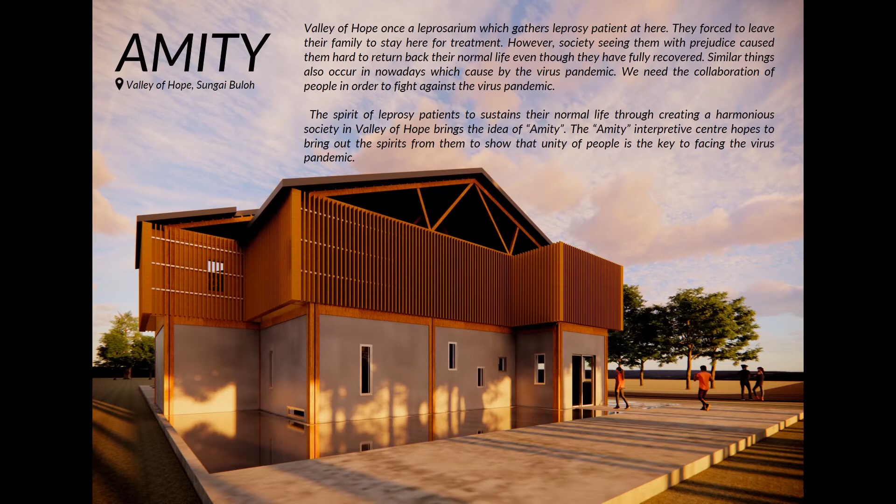Today I would like to present my interpretive center design to you, which is called AMITY. The site given is at Valley of Hope, Sungai Buloh. It was a leprosarium which gathered leprosy patients here. The patients were forced to leave their families to stay here for treatment. However, society seeing them with prejudice made it hard for them to return to their normal life even though they had fully recovered. Similar things also occur nowadays, caused by the virus pandemic.

We need the collaboration of people in order to fight against the virus pandemic. The spirit of leprosy patients to sustain their normal life through creating a harmonious society in Valley of Hope brings me the idea of amity. The Amity Interpretive Center hopes to bring out the spirit from them to show that unity of people is the key to facing the virus pandemic.

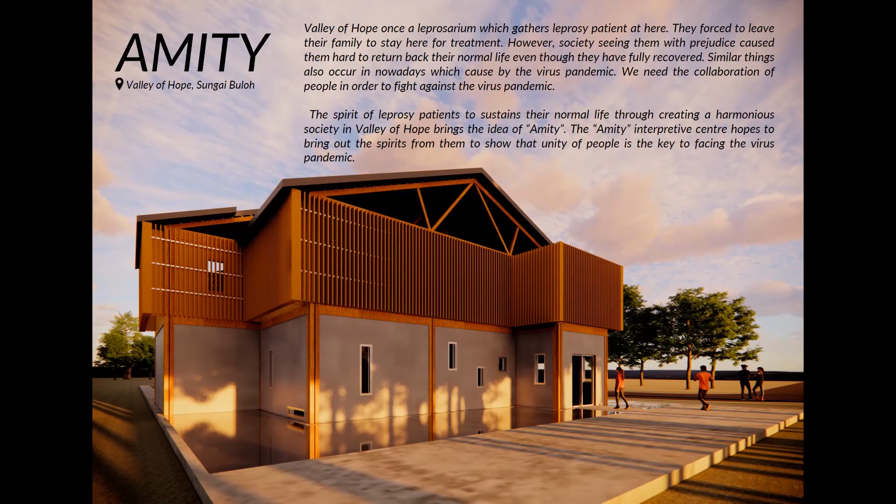First of all, I will start with site introduction. The site that I have chosen is the hall site and the building location is the shops behind the hall. It is 52 meters long and 18 meters wide. There are three main components surrounding the shops, which are the community hall, nursery, and kindergartens.

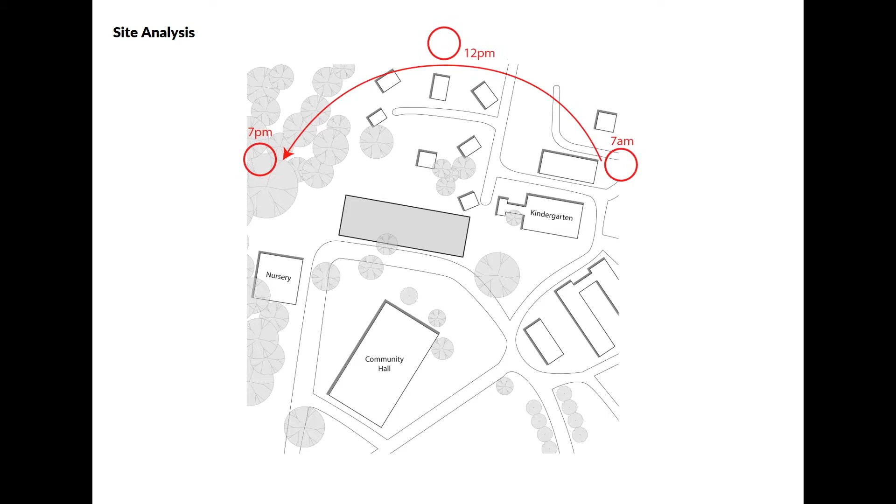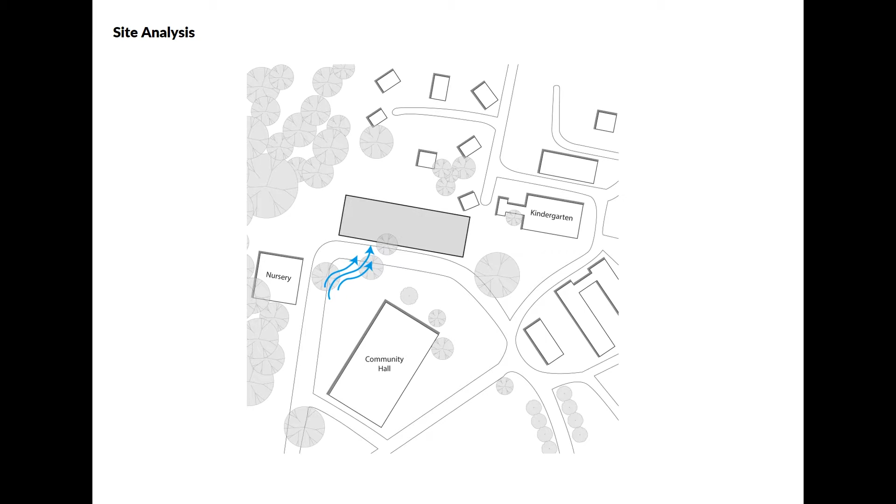Next will be the site analysis. The eastern and western sun is at the short side of the shops, while the north and south sides with long length can have large openings. The main wind comes from the southwest side, while the shops are also located at the main vehicle circulation. People can also access the shops by walking from the nursery, kindergartens and community hall. And those three places are where the main noise comes from. This makes the place livelier.

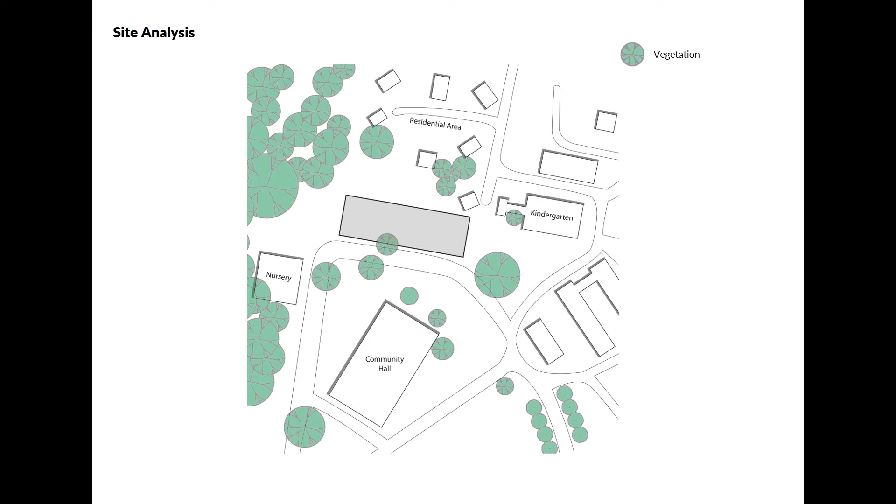And we can see that the west side has a large amount of vegetation, which provides shade to the shops, reducing the western sun directly penetrating the buildings.

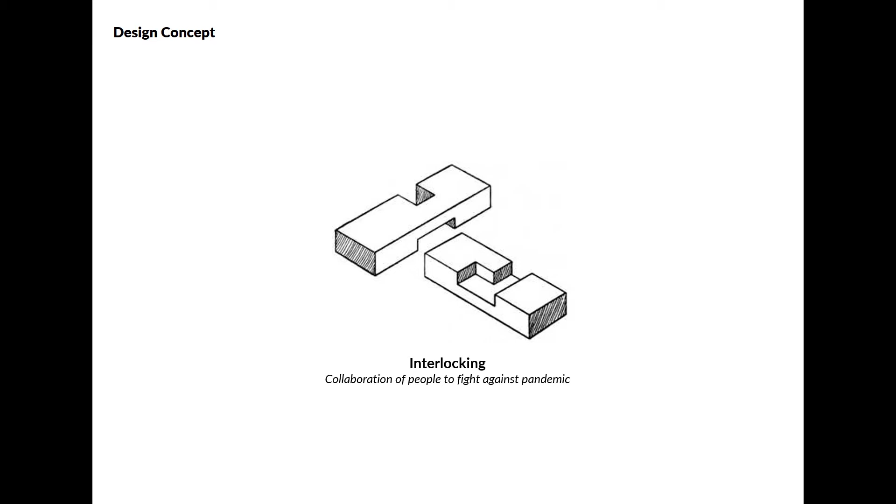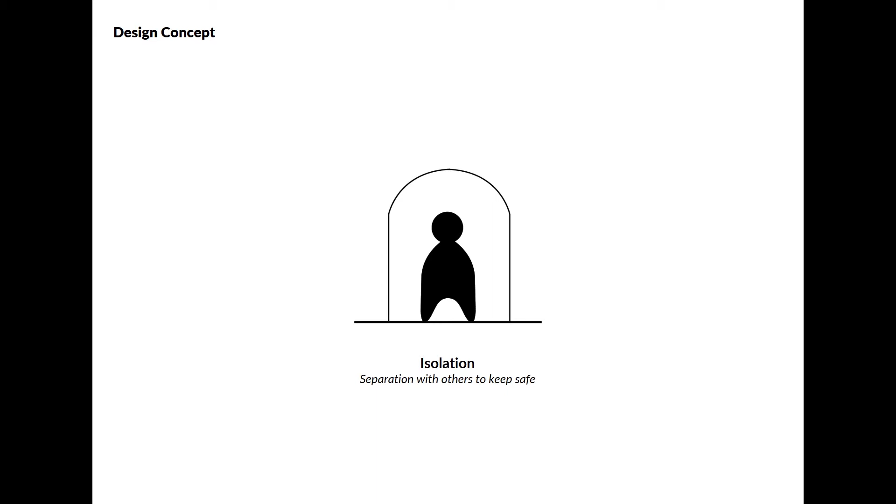Furthermore will be my design concept. There are three narrations. First will be interlocking. No matter for leprosy disease or nowadays pandemic, people need to work together in order to fight against the difficulty we face. Collaboration of people is just like interlocking, in which each of us plays a main role to face the pandemic. Second narration will be isolation. We need to keep social distancing or even quarantine to make sure ourselves are safe. This was experienced by leprosy patients, who had to isolate themselves from their families.

Third narration is appreciation. Some leprosy patients have faced amputations, but they appreciate that they can live until today. Same for us, we need to be grateful for what we have now, as it is the sacrifice of frontliners that keeps us safe from the pandemic.

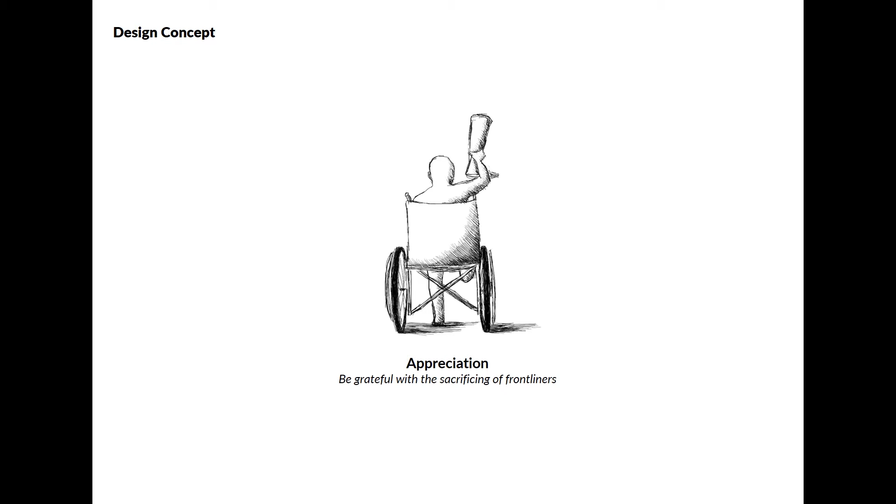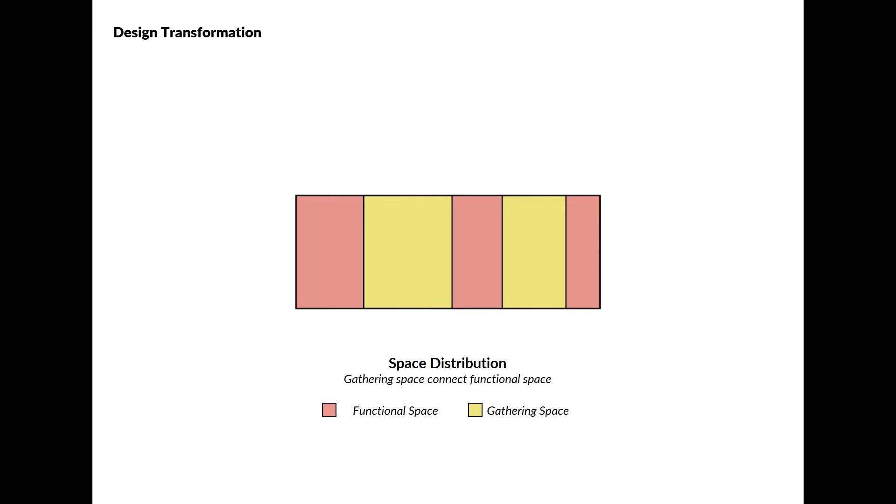Continuing on is the design transformation. First, the row of shops is my site boundary, and I distribute the space by connecting functional space with gathering space. Gathering space acts as the hub for people to access another functional space. Next, cut and fill the space to interlock them. The west side will be the main entrance of the interpretive center, which connects with the nursery.

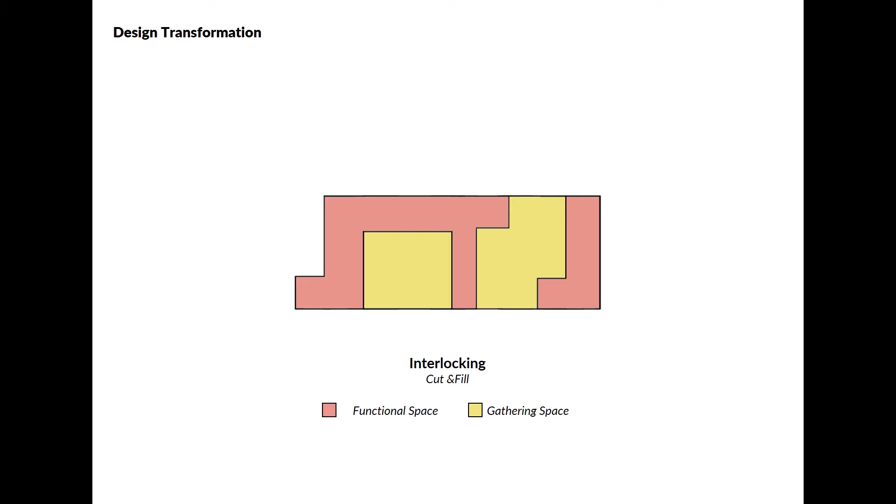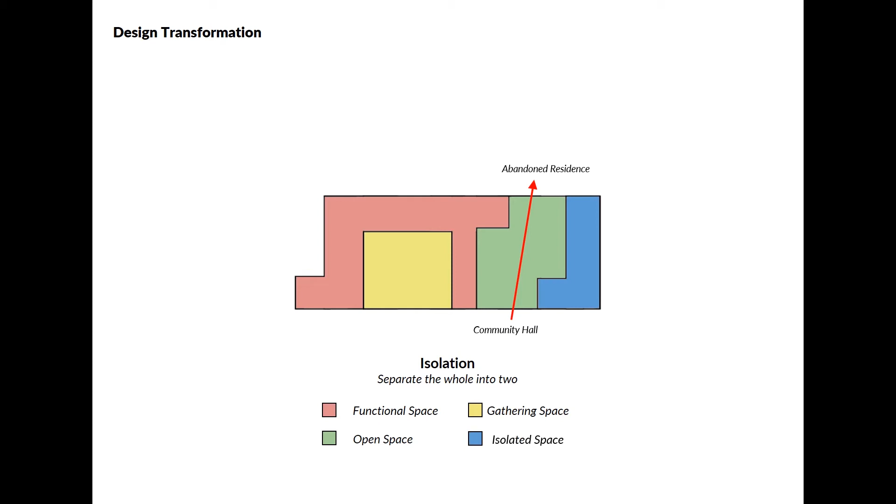Going on is to open up one of the gathering spaces to become outdoor space. The open space provides circulation connection from hall to the abandoned residence through the interpretive center. This isolates one of the functional spaces from others. Going on is to double up the building volume to have more usable spaces. Finally, connect the two spaces by a bridge and have an outer facade which merges the two buildings as a whole when seen from outside. This shows the idea of unity.

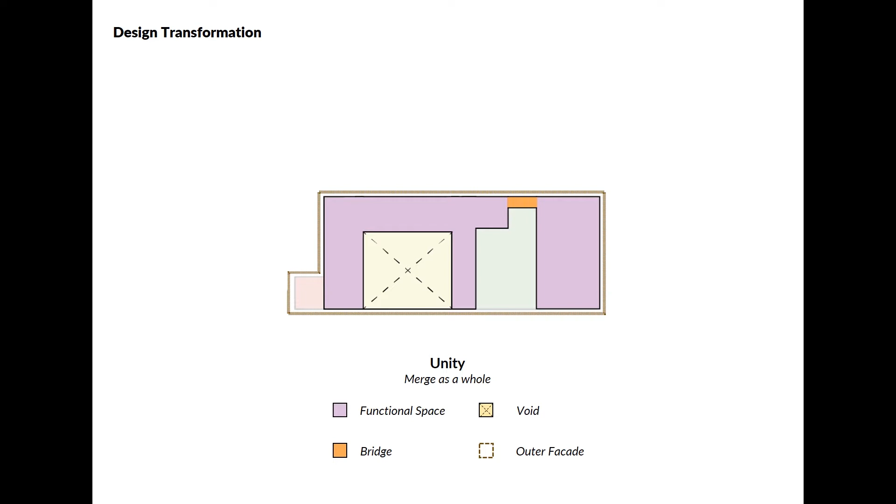Next, as we can see from the site plan, this is how the roof plan of my interpretive center looks like. The main entrance connects the nursery while the exit connects with the kindergarten. The middle open space allows users to have access from the hall to the abandoned residence area. This access and circulation shows how my interpretive center interlocks with surrounding elements and acts as a hub.

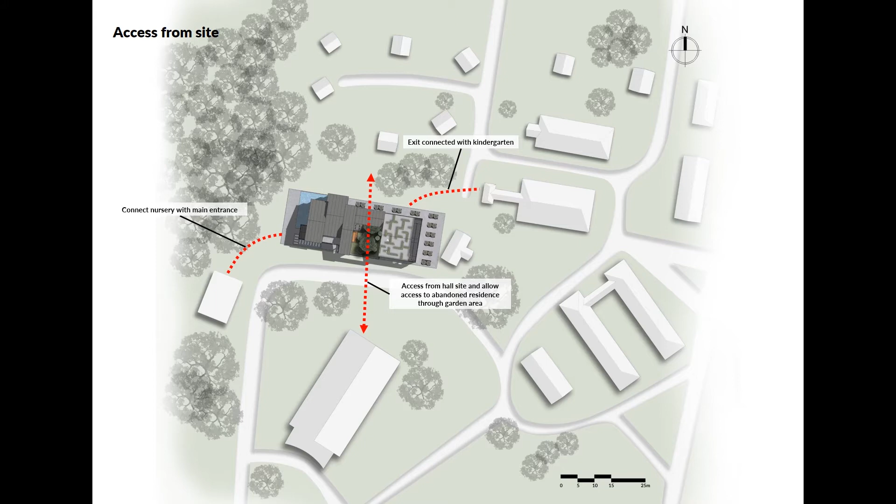Next, this is what we can view from the interpretive center to the surroundings. First is the community hall. Second is nursery. Third is more forest. Fourth is abandoned house. And fifth is kindergarten.

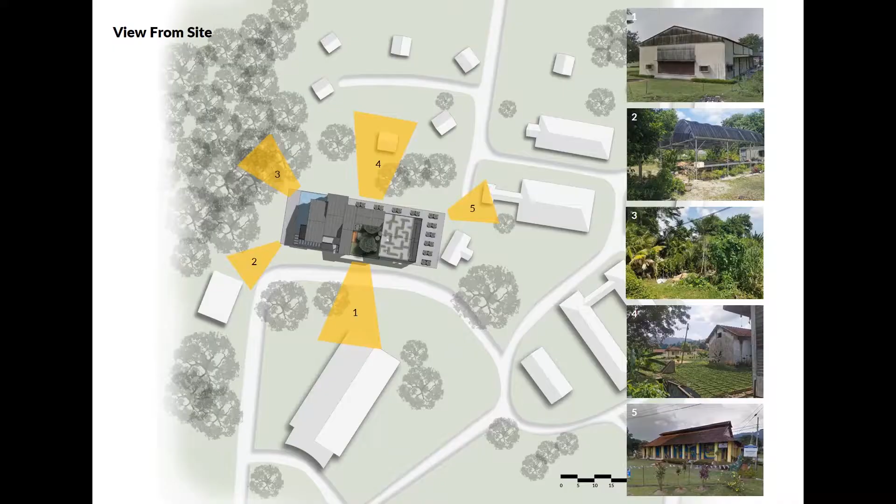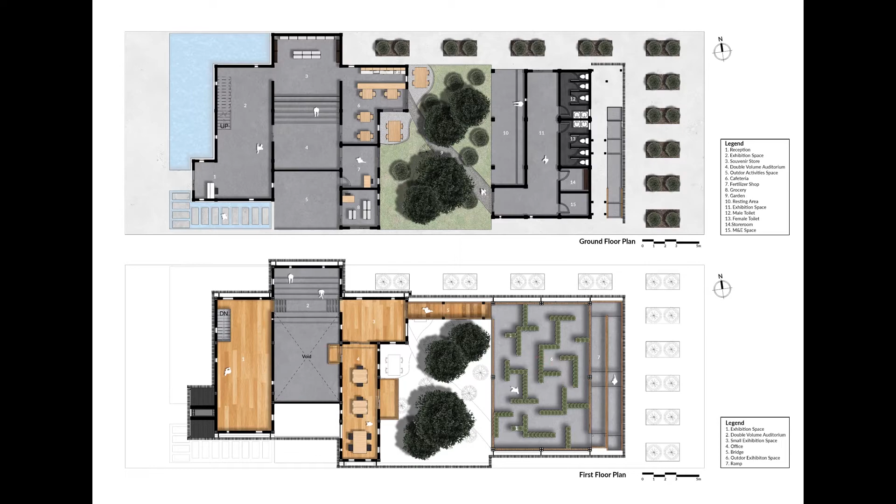For the first floor plan, there will be exhibition space, double volume auditorium connecting the small exhibition space, continuing with office, bridge, outdoor exhibition space, and finally ramp. The covered internal space is 389 square meters in total.

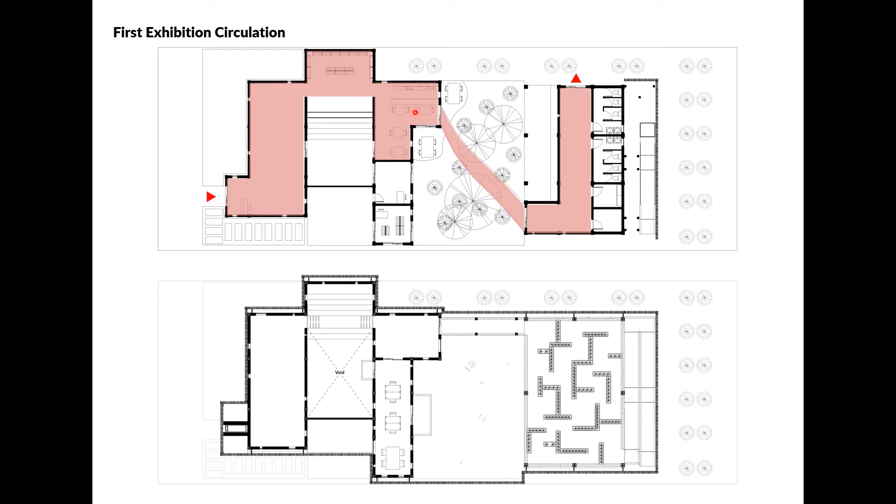Then, we will look at the exhibition circulation. There are two exhibition circulations in the Interpretive Center. First will be the ground floor exhibition, which passes through the souvenir shops and cafeteria from one exhibition space to the isolated exhibition space. Second, we start from the same exhibition space and continue to the first floor, go through the auditorium and small exhibition space, and finally arrive at the outdoor exhibition space by the bridge and exit through the ramp.

We can see that the two exhibition circulations have different exits, which show the narration of isolation through diverging the circulations.

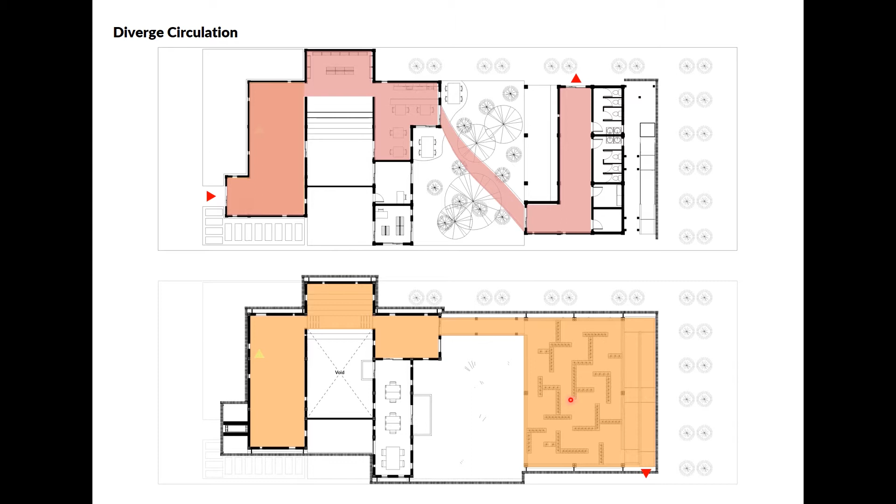Next, we're looking at elevation. First is the east elevation. The outer facade creates permeability of view when people look from the surroundings towards the center. This will create curiosity for people to enter the space.

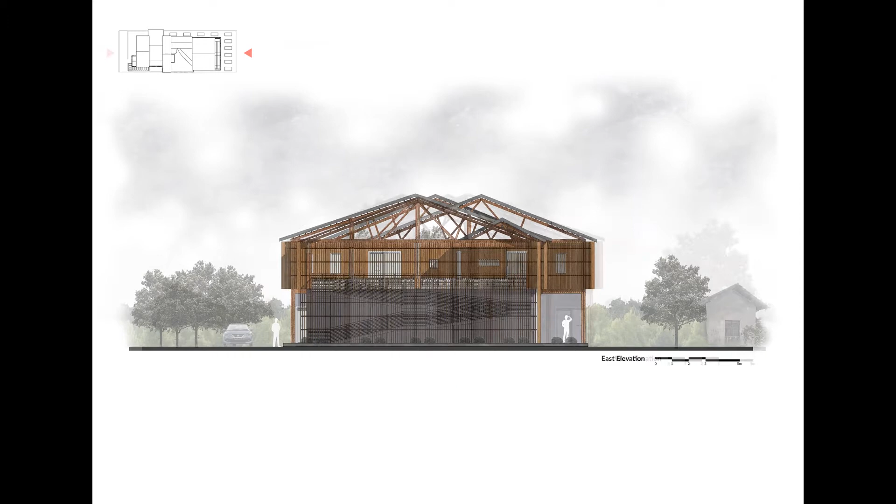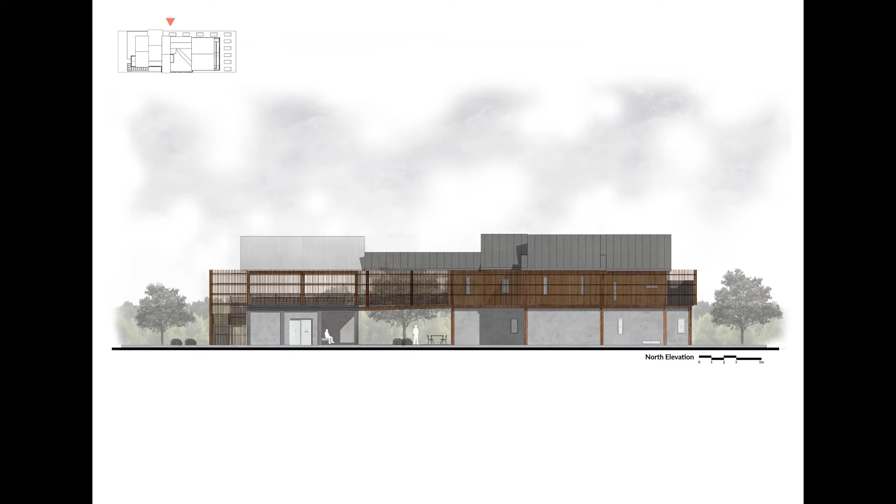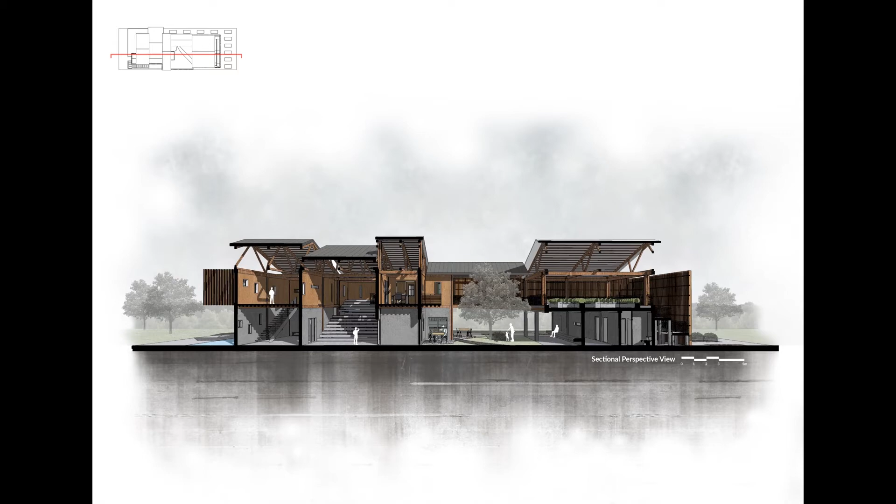For the sectional perspective view, we can see that the ground floor is using concrete while the first floor is using timber, as these two materials represent the history of the site: timber residences were the earliest while concrete residences were newer. The two materials applied also merge past and present together in the interpretive center.

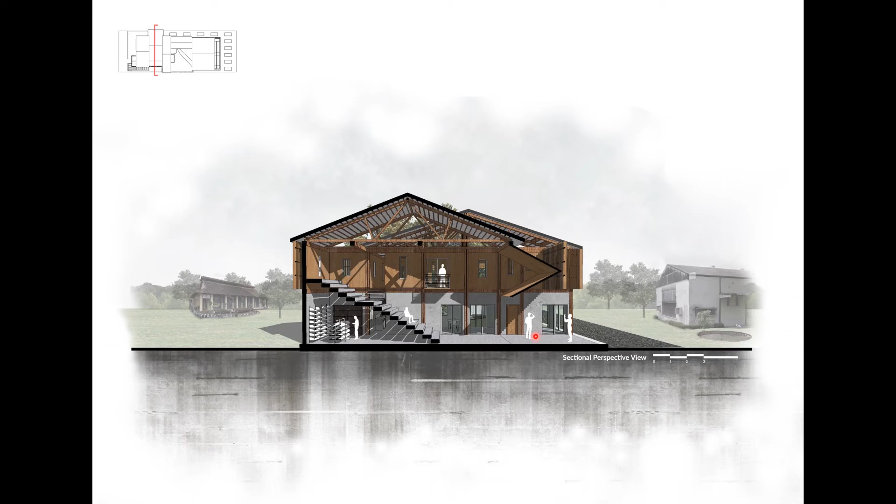From this sectional perspective view, we can see the space distribution of the double volume auditorium and souvenir shop. People in the souvenir shop can glance at the activities occurring in the auditorium through the gaps between the seats of the auditorium. The movable facade helps to open up the space, which can be used as indoor space or to enlarge the outdoor activity space.

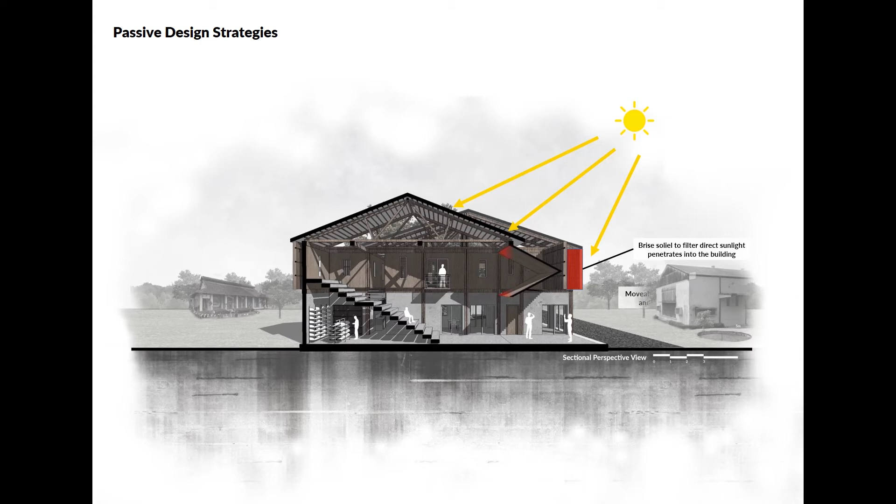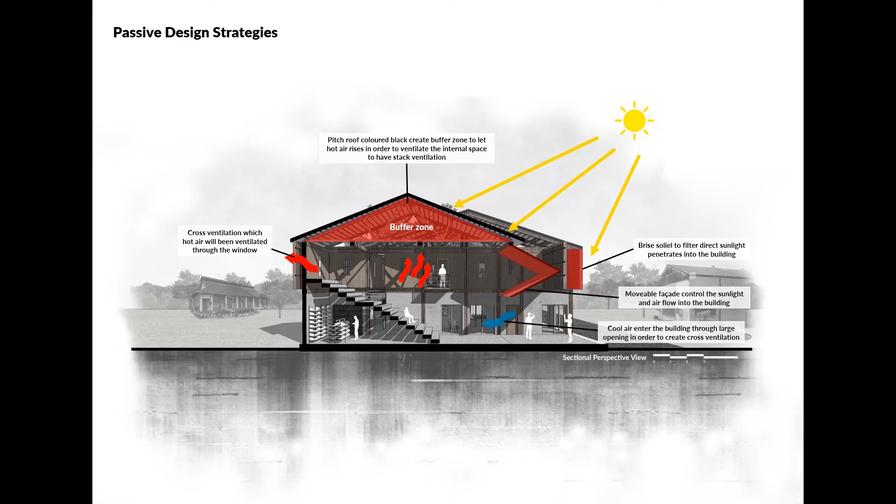Moving forward is passive design strategies. As Malaysia is located in a hot and humid area, it is necessary to have shading to create a comfort zone inside the building. Brise soleil helps to filter direct sunlight penetrating the space, while the movable facade is able to control sunlight and air ventilation. Cross ventilation occurs when cool air comes in from the movable facade and hot air goes out through windows. Besides, when hot air rises, the rooftop area will act as a buffer zone for stack ventilation.

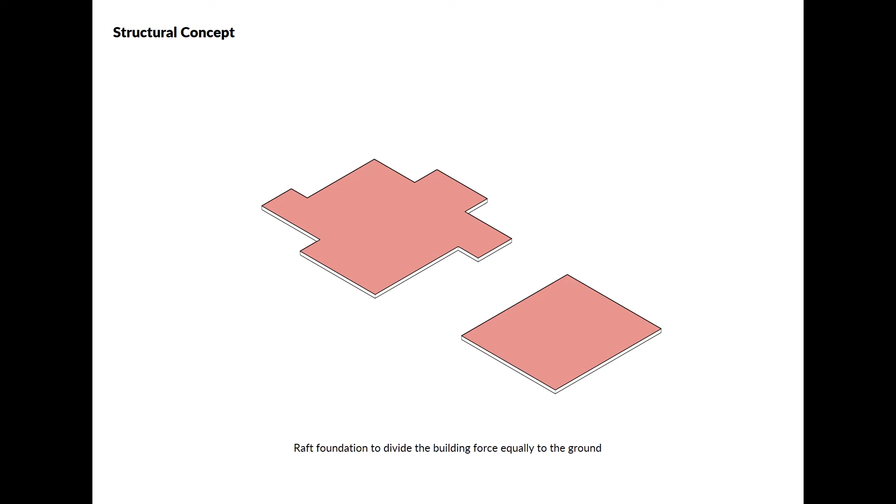Furthermore, is the structural concept of the interpretive center. Structure plays a main role in my design. When I designed it, I wanted it to be exposed and let people see the structure in order to appreciate the construction of the interpretive center. To start off the center, the foundation is important. Raft foundations help to distribute the building's force equally to the ground, as my building is long.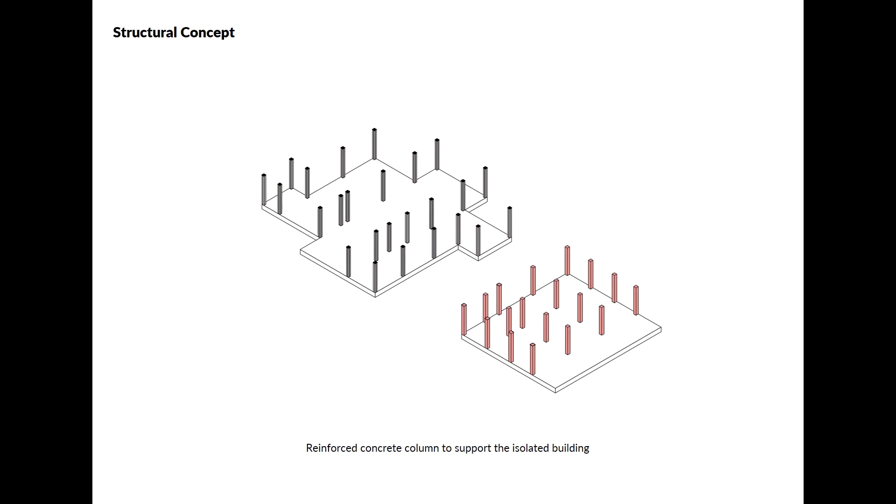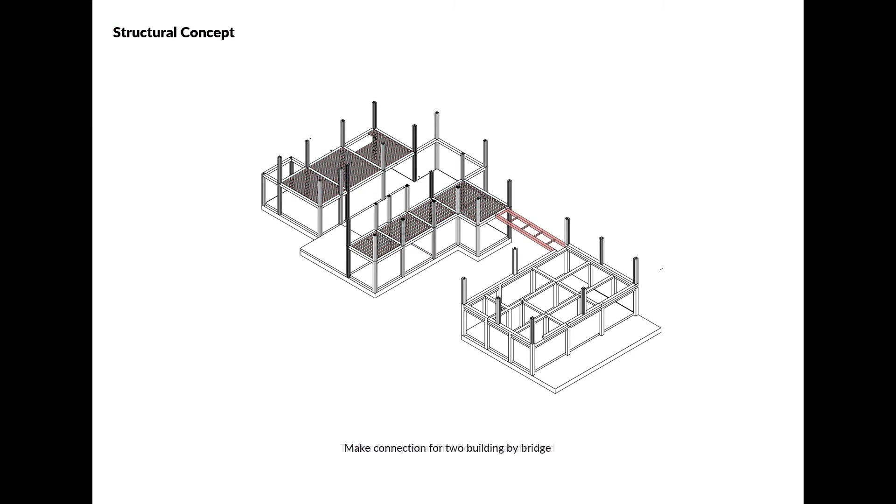Next, adding timber quadra columns as the main support for the main building. Continue on with reinforced concrete columns for the isolated building. Then, adding beams and columns to support the roof and first floor. Concrete floor finishing is used for the ground floor, which prevents ground moisture from damaging the floor. Next, adding timber floor joists at the first floor to transfer the load. Continue on to connect the two buildings by the bridge.

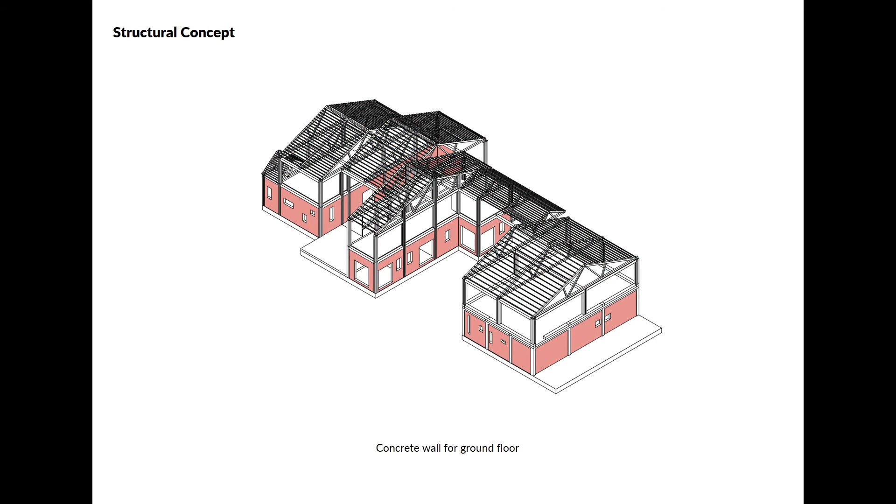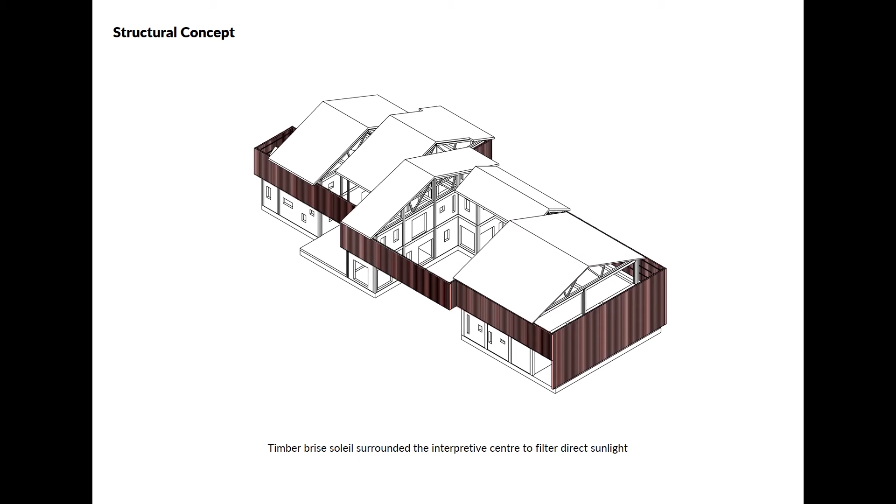Timber floor finishing is used for the first floor, which is strong and durable for the main building, while a concrete flat roof is used for the isolated building. Carry on, adding the truss system and roof joists to support the roof. For wall material, concrete was used for the ground floor, while timber was used for the first floor wall. Next, the roof uses zinc as material, which can protect the roof from weather elements, while the polycarbonate roof for the outdoor exhibition space allows sunlight to shine through. Finally, timber brise soleil surrounds the interpretive center to filter the direct sunlight.

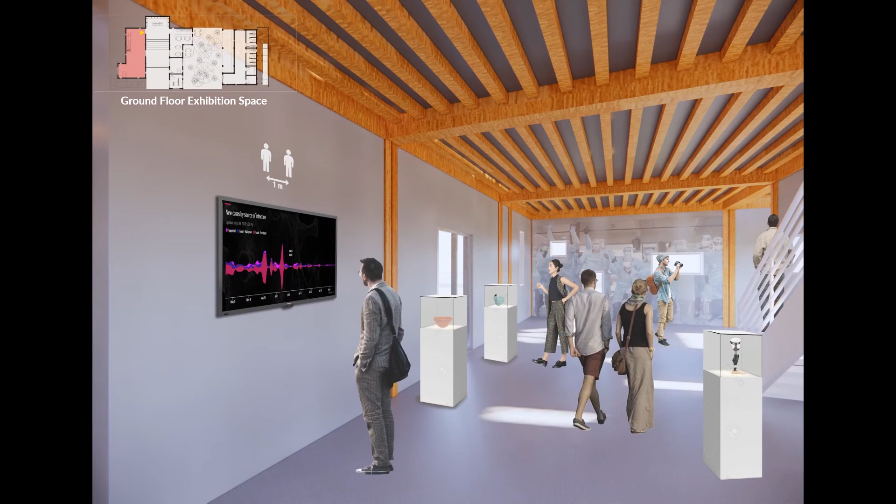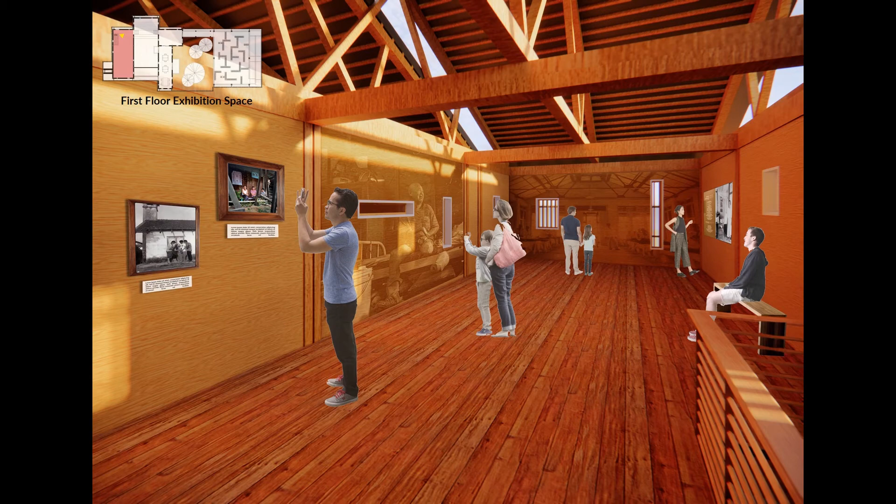The ground floor exhibition space is more like a modern exhibition, which is cool and brings the emotion of calm. For the first floor exhibition space, the timber materials give users a feeling of warmth, and looking at the roof structures to understand how the building was built brings out the narration of appreciation.

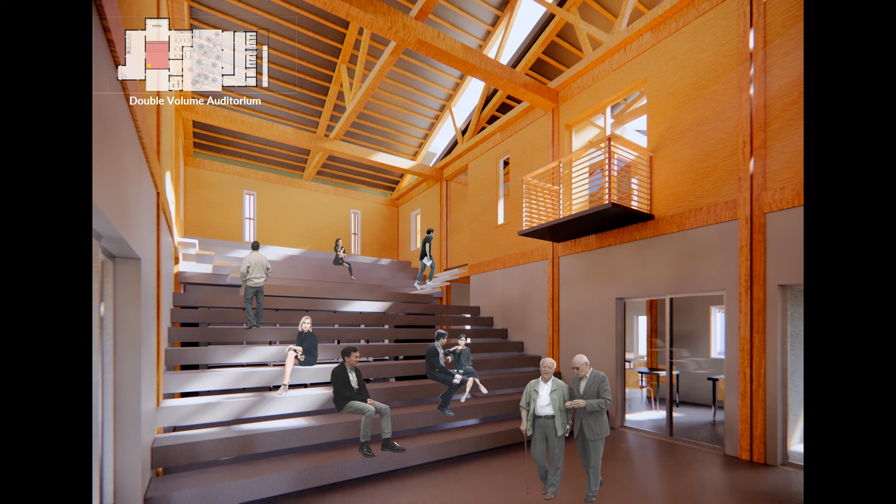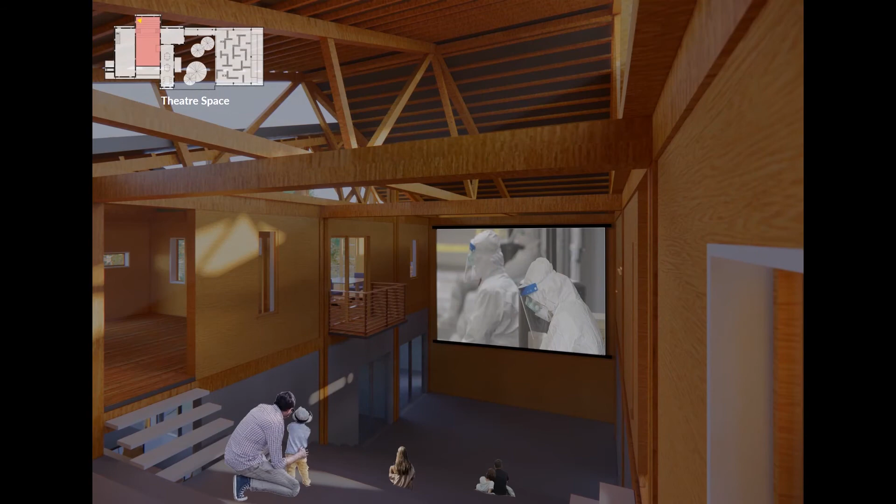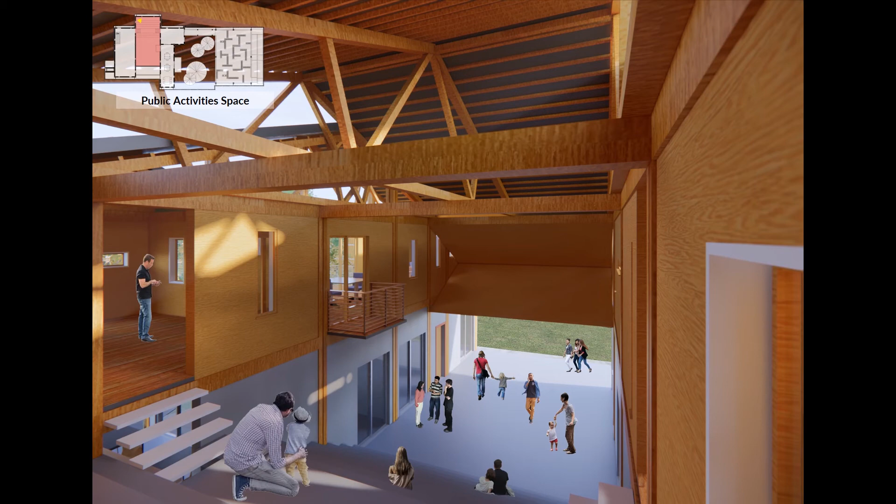Moving forward to the double volume auditorium, which combines stair and walkway as one. It allows people to be free and at ease here, and is also the place for tour guides to tell the story of the site to tourists. When the movable facade is closed, it becomes a theater space for people to watch movies as one of the exhibits. When it opens, it connects the internal space with the external space while enlarging the outdoor activity area. People sitting in the auditorium can have a nice view towards the community hall.

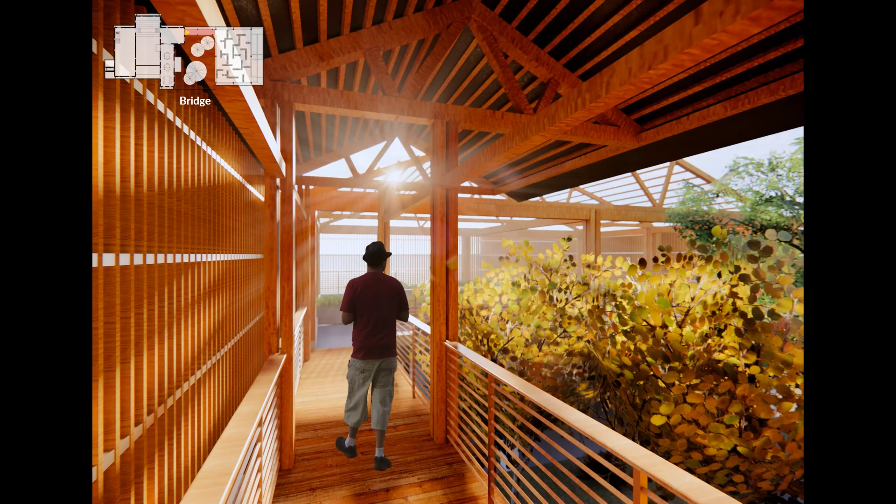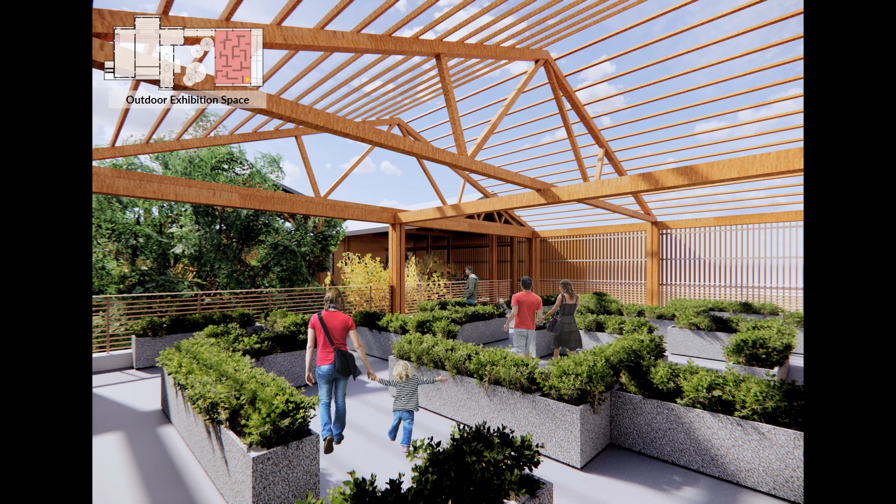Moving to the bridge, it is the only connection of the main building to the isolated building. We can see the interlock of the timber quadra columns with the beams to support the building. Finally is the outdoor exhibition space, which has different kinds of plantation in maze form to bring the idea of social distancing and also shows the hope of the site, which is the plantation.

Before I end my presentation, please have a look at my design through videos.